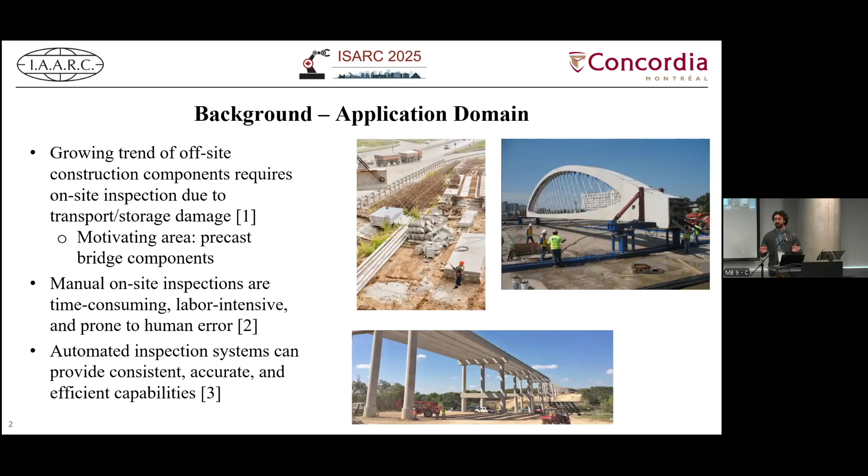And there's been a lot of background and related work to this. Drones have become very popular in both industry and research for this type of application, in structural health monitoring and surveillance of construction sites. There's been a lot of work in ground robots as well. They offer good flexibility in terms of operating times and being able to carry heavier payloads. So we saw a lot of opportunity for multi-robot inspection, combining aerial robots and ground robots to have more flexible operating conditions to perform on-site inspections.

Now, ideally, we'd like this to be fully autonomous, but the technology is not really there yet. There's still a lot of complications when you're working in different construction environments. So because of that, most frameworks have a human in the loop, that is, a human at some point in the framework providing control and direction to the robots. That can be done through different teleoperation methods and different control interfaces.

Now, for this particular application, we're looking at gaze-based robot control because we've seen a lot of potential there for intuitive control methods. And the final point is more related to research in general, and that is software replicability. In general, most research starts from the ground up in terms of software. So we want to provide some frameworks there to make that more user-friendly.

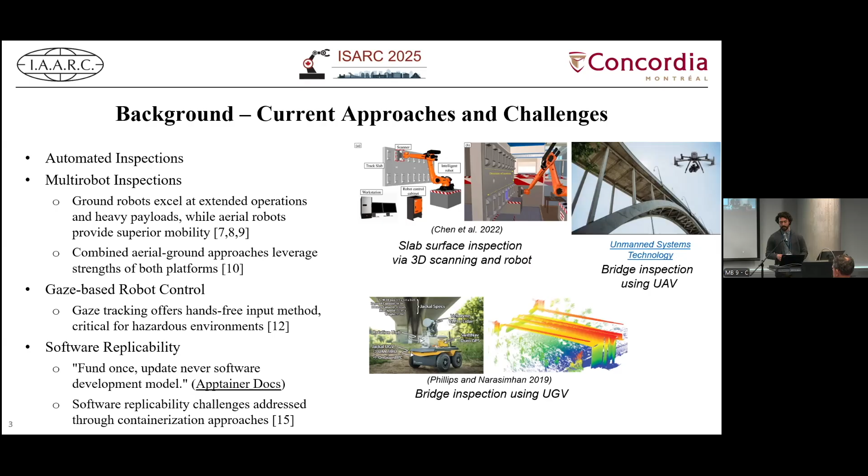So as I described, we're using an aerial robot and a ground robot to facilitate an on-site inspection. We have a human operator using eye tracking capabilities to provide contextual data to the ground robot. That is, using their gaze and fixation points at certain points within the inspection pipeline to give additional information as to what exactly needs to be inspected in terms of the components.

This is facilitated through different interfaces. For the drone, we have aerial controllers that the operator would use. And we also have an application user interface that we developed for the data streaming through the ground robot and coordination between the two. And it's also open source, so at the end of the slides and in the paper, we provide links to that. This is a block diagram of the system design.

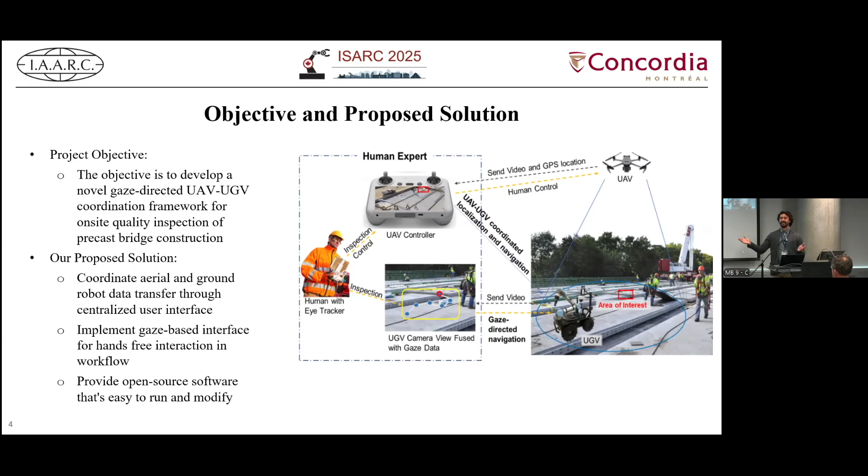So as I said, we have ground robots, potentially a fleet of ground robots, and a drone. Going back to the previous slide, with the drone capabilities, we initially want to get some waypoints. We want to know where the object to be inspected is in the construction site, because our initial map might not match the current state, since things tend to get moved around. So we want to create GPS-based waypoints that construct a mission of multiple waypoints.

With the drone, we also want to get some contextual information so the ground robot can then do the autonomous navigation to the location. That contextual information in our case is target reference images, that is, images of the object to be inspected, so the ground robot has some context to later use through a computer vision pipeline or things of that sort.

As you can see here, it's streamlined and centralized through a user interface app where the operator can coordinate the data flow. You have the gaze module, as I discussed, and an additional module at the bottom, a segmentation module. With the gaze-based data, we get pixel coordinate points, so very fine, low-level information. We want to expand that to get larger grained information of what needs to be inspected. So with a single point on, say, a girder, you can get a larger mask of what the robot should be inspecting.

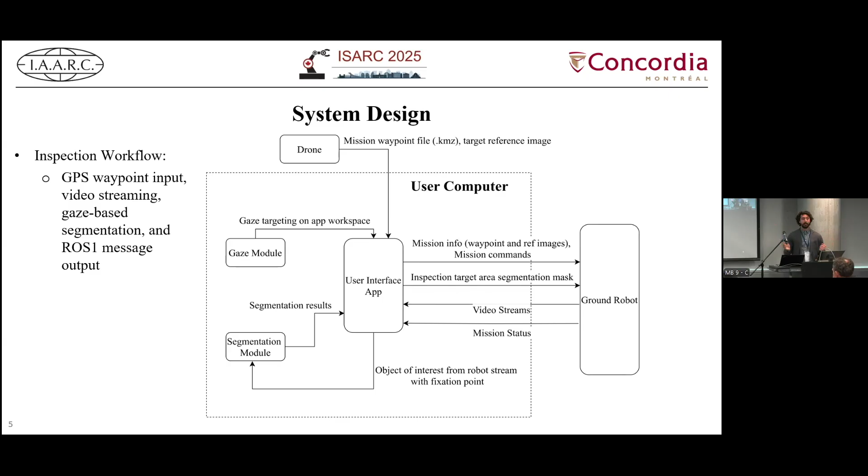And as an addition to the system design, we use a containerized architecture. So containers such as Docker containers, which we use in this work, can be coordinated through Docker Compose, which allows you to coordinate multiple containers into a larger application.

So containers are typically isolated. That is, they're isolated virtual environments or virtual machines, but are much lower level. So they have kernel level access and ideally they can be replicated on any computer. So through a configuration file, you can spin up this environment and have a whole application deployable very quickly. So we manage the communication and data flow between these different isolated environments using the ZeroMQ data library and proxies between them.

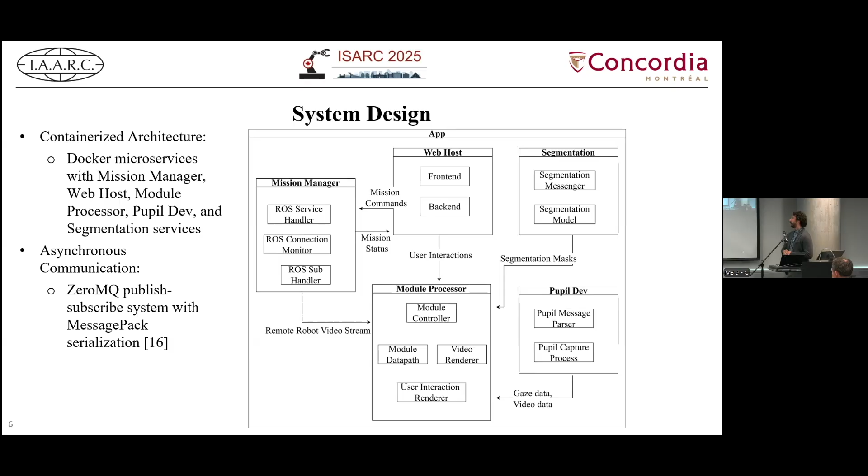And this is an image of the user interface for the ground robot and aerial streaming. So one of the benefits of this is we use a browser-based application. That allows us to deploy on multiple operating systems and multiple browser types. As you can see here, we have buttons for the state indicators for where the robot is within the mission pipeline, which we'll see in the next slide.

And we also have some AprilTags. So as we've said, the operator has a gaze interface. These AprilTags allow us to create a bounded area in which the gaze is used. So that allows us to get a very precise pixel-level location of where the user is looking and where they're fixating.

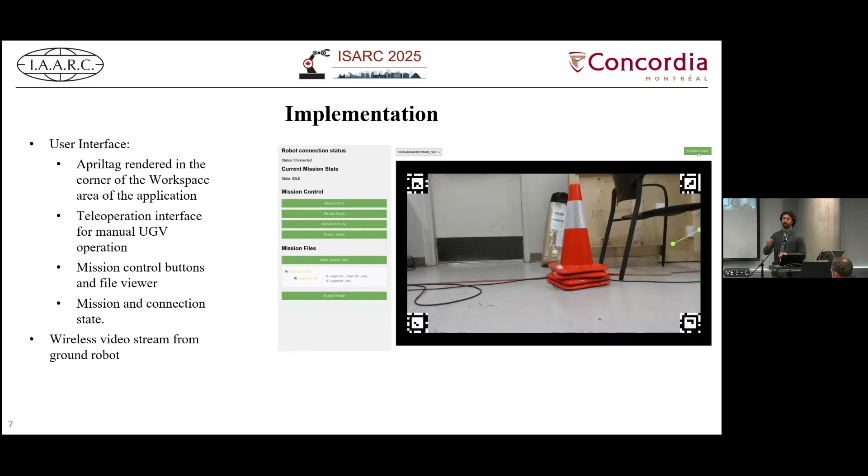So we tested this software in an outdoor environment. We have a drone cage at UTSA that allows us free range and free roaming within this space. So we tested with a mock environment. You see a bridge there we put in for the environment, using a local Wi-Fi network where we had a human operator coordinating these two robots with the application. We used a DJI Matrice drone and the A200 ClearPath ground robot, and then the Pupil Core eye tracking glasses.

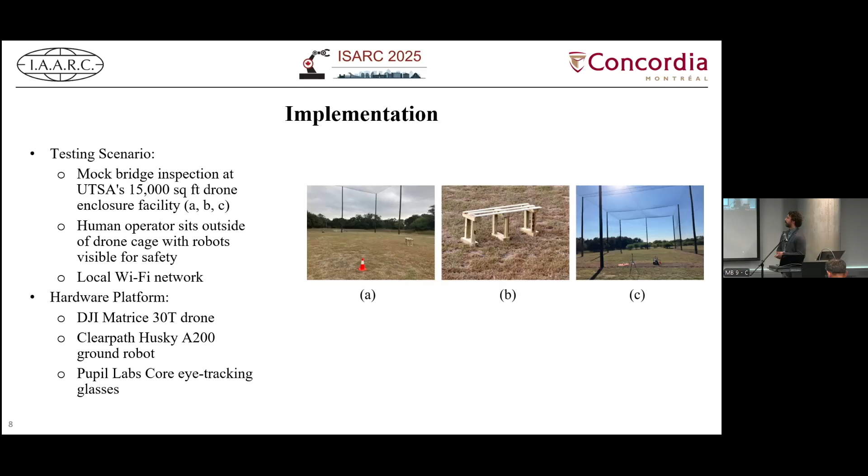So at a high level, the mission workflow would look like this. We have three stages. The data gathering stage, as I said, is where the human operator would send a drone to a location. So if you were going to inspect that bridge from the previous picture, you would send the drone there first, gather GPS-based waypoints, and then contextual images. And if you have multiple, you could get multiple of those. Once you have those, you save them and pass them to our user interface.

Those then get sent to the mission execution phase, in which the ground robot or fleet of ground robots would coordinate to dispatch to those locations. Once they autonomously drive to those locations and find the area of interest, then you would have the inspection phase, and this is where the gaze-based portion comes in, in order to get more fine-tuned data and also specify what exactly you want to inspect within this construction component.